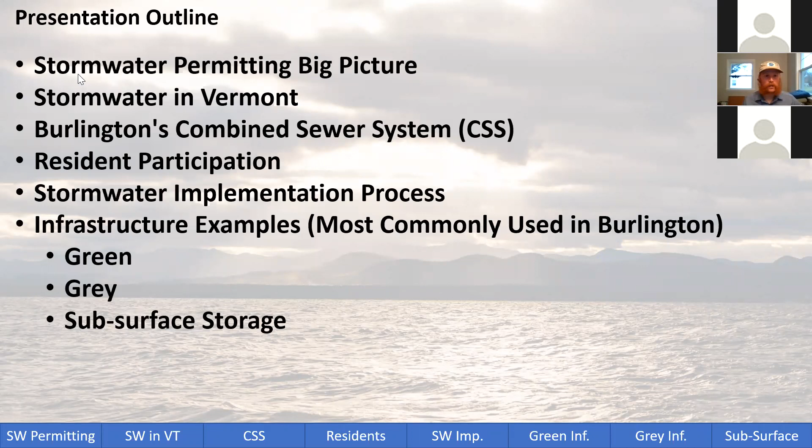Okay, we're gonna have a little bit of fun with this slide. I wish I could hear you all because I'm sure you'll be laughing, but I really wanted to take a minute and put the national permitting history for stormwater in terms of our national social structure and things that have happened in our history, to put them in context.

So you go all the way back to 1963 and you have the implementation of the Clean Air Act. This is the real big umbrella legislation that eventually led to the Clean Water Act in 1972. But starting back in 1963, the federal government said, we got to start cleaning up our air.

If you were eating what you would consider buffalo wings at that time, you would not have called them buffalo wings. That name wasn't even invented yet. I think that's really important to know that, you know, our nation at least started dealing with clean air before we named the buffalo wing. Also, that's before the 8-track. If you don't know what that is, that's okay, not surprised. It's something you listened to music with back in the day. And if you were on one of Vermont's slopes back in 1963, you weren't snowboarding because snowboarding hadn't even come out yet.

So moving forward to 1972, the Clean Water Act. They took the Clean Air Act, used that big umbrella to create the Clean Water Act. This originally focused mostly on point source pollution. Point source is, let's say you have some sort of business or industrial activity that is generating waste, and all that waste will come literally out of a pipe, a point source, and then end up in a water body. So that's what the Clean Water Act was originally designed to tackle.

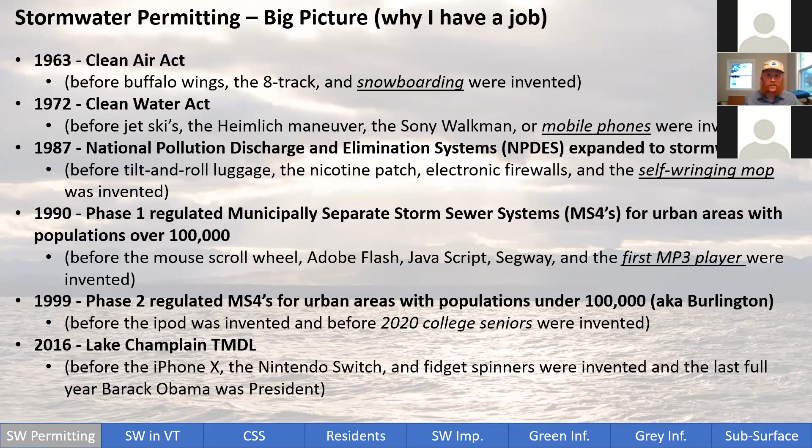One of the reasons why I have a job, and that was before the iPhone X, Nintendo Switch, fidget spinners came out in 2016, also very important, and that was the last full year of Barack Obama's presidency. So now you have a very good picture of what the nation was like when certain aspects of those national and state regulations came out.

Okay, narrowing down into Vermont. A stormwater utility, just real briefly, big picture definition of what a stormwater utility is. A utility collects fees from parcels based on their land use and impervious cover. We then take that information, pull it in, analyze it, digest it, and then use that information to assign a fee to each parcel based on that impervious cover and that land use.

What's important about most utilities, and that's certainly true for Williston and Burlington, is that money then becomes dedicated in an enterprise fund to stormwater. What does that mean? It means that any money we spend from those fees has to have a direct nexus to managing stormwater water quality here in Burlington.

Stormwater utilities in Vermont. The first one was South Burlington. They sort of broke ground and were the visionaries for getting utilities in Vermont. Burlington came in after, then Williston back in 2015, pretty quickly after that, Colchester and St. Albans City. This is pretty common with stormwater utilities, pretty fascinating. I've heard them referred to as geographic hotspots.

So what will happen is a municipality will, for one reason or another, say we need a stormwater utility. And that first one is actually pretty expensive. They often need to prove they have the legal right to create a utility. They'll do that either in partnership with or versus the state. Quite often local business people may fight that, adding costs of litigation or just staff time to figure out what they want to do to make sure they can move forward into the realm of utility.

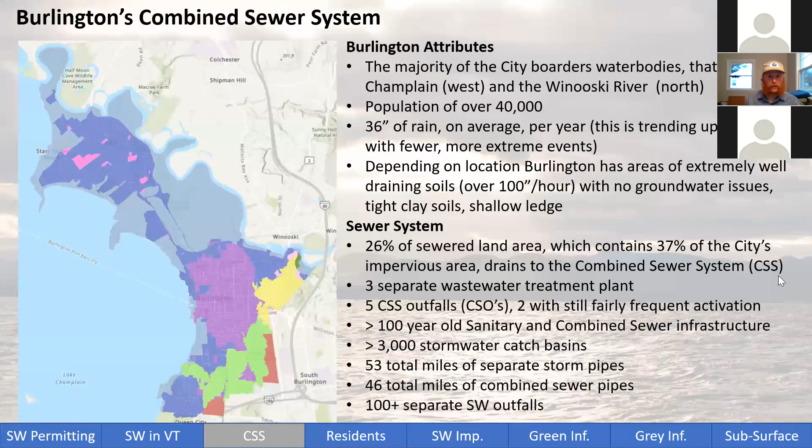You start with design considerations. What sewer sheds do we want to locate these systems in? The image here, I'm going to jump back a couple slides. If you look at that purple triangle in the bottom of the screen that's surrounded by the light green, jumping forward, that's what we're looking at.

Now, what sewer shed do we want to look at these systems in? This is a combined sewer system, so one of those in-holdings surrounded by disconnected areas. This contributes to one of our active CSOs. And pretty much this screenshot I have here, it's just that area.

You go a little south, little east, little north, and obviously, well, east is the Burlington Country Club, so not east, but you just go anywhere outside of this screenshot of the area, and it's no longer contributing to the Pine Barge Canal CSO. So siting is absolutely essential when we're picking a location.

So now we've picked a location, be it a combined sewer area contributing to an active CSO, or maybe in an impaired stormwater watershed such as Englesby Brook. We sited it because we want to do something there. What do we think about? Well, further location, is it in the greenbelt? Pretty limited space in a lot of greenbelts.

Traffic calming bump out. Bump outs are great. You reclaim impervious roadway. But then you have traffic implications, parking implications. Public parcels, sure, we own it, but we don't have a lot of public parcels. They're very limited. So we don't necessarily want to site stormwater in a public parcel.

Private parcels, okay, a lot of private parcels. They are undoubtedly located where we want to put stormwater systems, but then you have a real sticky situation with long-term maintenance and upkeep and ownership of that stormwater system, and what happens if the owner changes hands and isn't as amenable. So that's got a lot of complications.

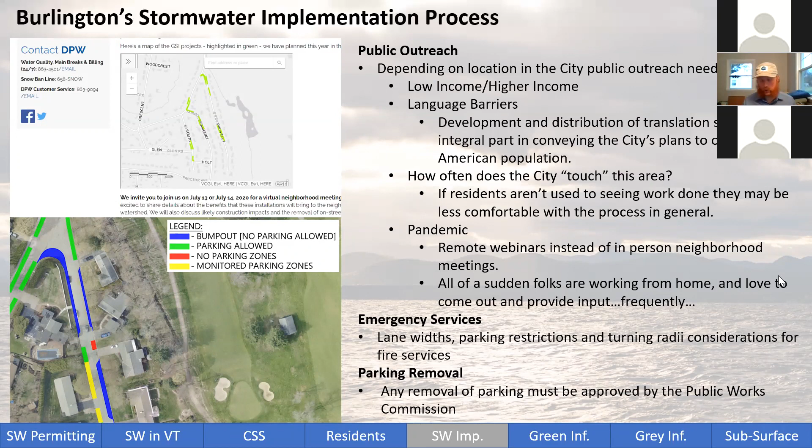Okay, we're near the end of the presentation. I'm going to speed through a few of these systems. You can see what the city of Burlington tries to implement to manage our stormwater. This Hyde Street bioretention system is one of the oldest, if not the oldest, bioretentions we have in the city. Mansfield Ave. This is one of the only ones that's located entirely within a green belt, which is pretty cool. A lot of others have some sort of bump out component to them.

Grant and Winooski, if you live in Burlington, this is a pretty heavy foot traffic area, all things considered. You can see some sunflowers back there. We're very lucky. Many of our stormwater systems have had a lot of volunteer labor. And if you walk by this one, they'll have some beautiful perennials. And it's pretty great to see the local community taking ownership of how these things look and function.

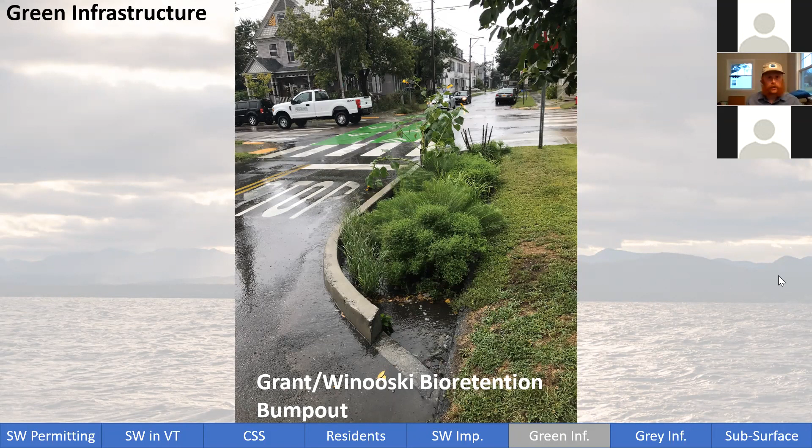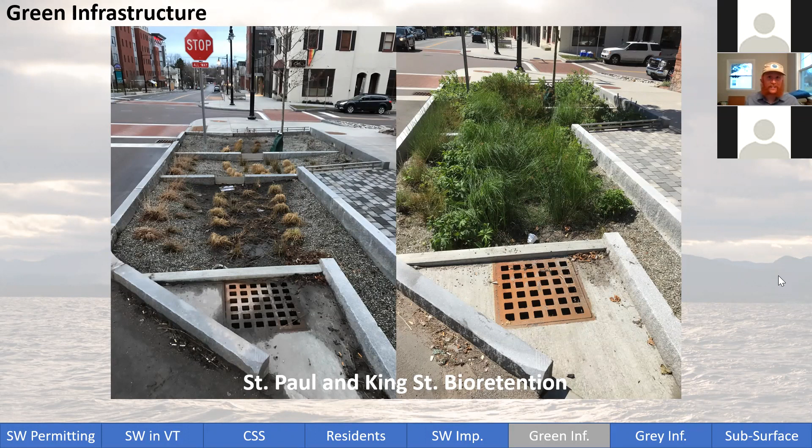Even if you communicate maintenance needs to your maintenance professionals in a city, it's hard to get them to change practices. But also local businesses will do their own salting, sanding, whatnot to encourage folks coming to their place of business. So there is an educational lift that we can always get better at, but we do try to pass along.

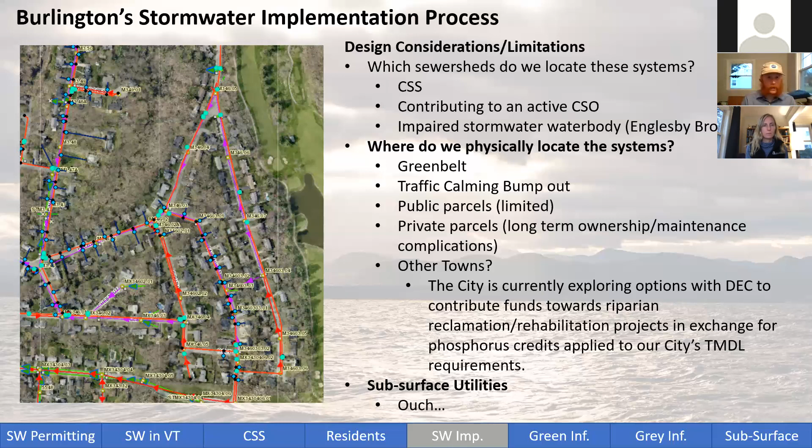In 10 years, maybe we'll have a lot of options for porous asphalt, but right now that's just not the case. Thanks. I don't see other questions right now. So one follow up on that is the truck that you were saying you're procuring right now, that's to manage the porous asphalt?